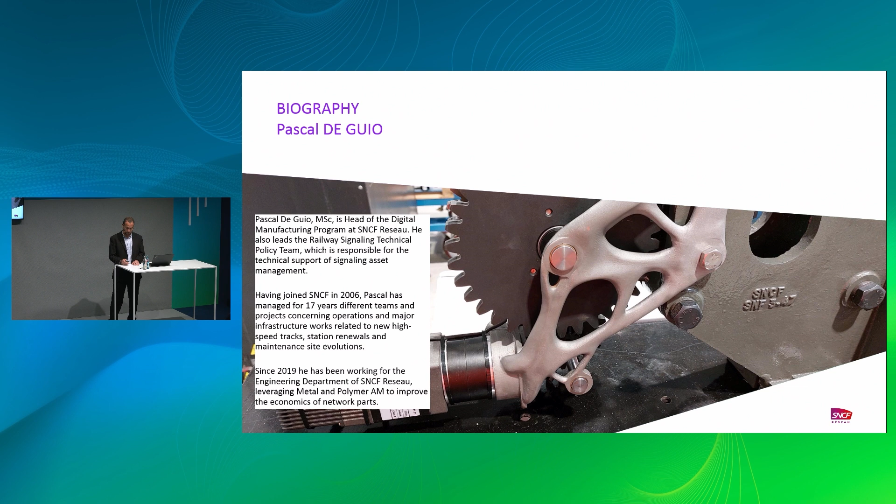So today my main objective is to share with you what are our stakes in additive, why we need additive, and what we need from the industry to really find solutions to our issues. This will be the first and main part of what I want to do today. I will then give you a few insights on the technical side of the job, what we do, what we have done, what remains to be done, and then I will try to summarize quickly in a single slide, but I think the main takeaway will be in this slide.

The first slide has only one purpose, just to explain that we do not deal with trains. I mean, passenger trains and freight trains are not in the scope of the infrastructure manager. Usually, when I talk about additive manufacturing for the rail company, people want to talk to me about flame retardancy, like in the previous meeting. I'm not really interested in flame retardancy, because I do not have passenger trains in my scope.

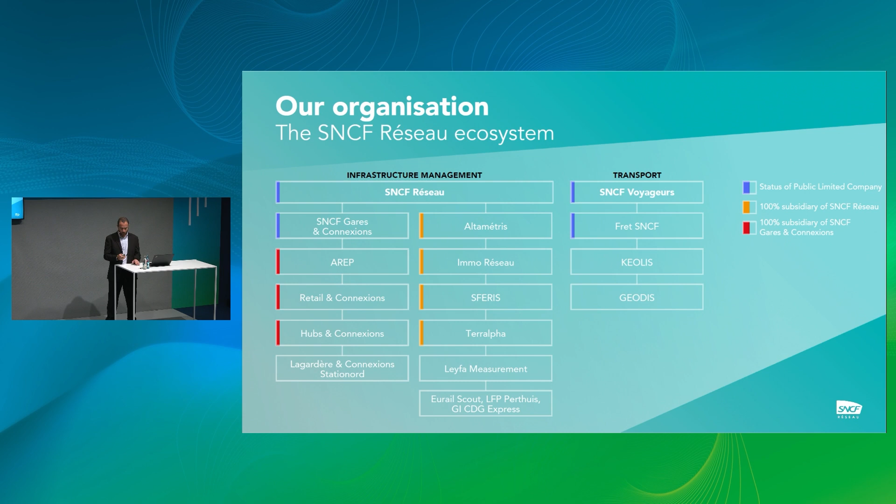So if we do not deal with the trains, what is our job? Mainly we sell the right to use the network. That's how we have our incomes, something like $8 billion per year, which allows us to maintain, develop, and modernize the network. Just to give you an order of magnitude, there are something like 50,000 people in SNCF Reseau, so it's quite a big company.

A classic picture, I think everybody has seen it at least one time in his life. What is the consistency of the network? Why are we interested in additive? Because we have a lot of different parts. Usually people don't imagine. First of all, we have the railway signaling. Railway signaling is not only about the signals, even if it's in the name. Signals are only the last step of the rail signaling job. Meaning, before opening a signal to a train, we have to know a lot of things.

Where are the trains? So we have every device on the track for train location, track circuits, axle counters, these kind of things. We have, of course, the command and control systems with a lot of different kinds of technologies. And with the input, we can use signals as output. Just to say, signaling is something like 15,000 different reference parts. So it's absolutely not only about signals, there's a lot of mechanical parts behind.

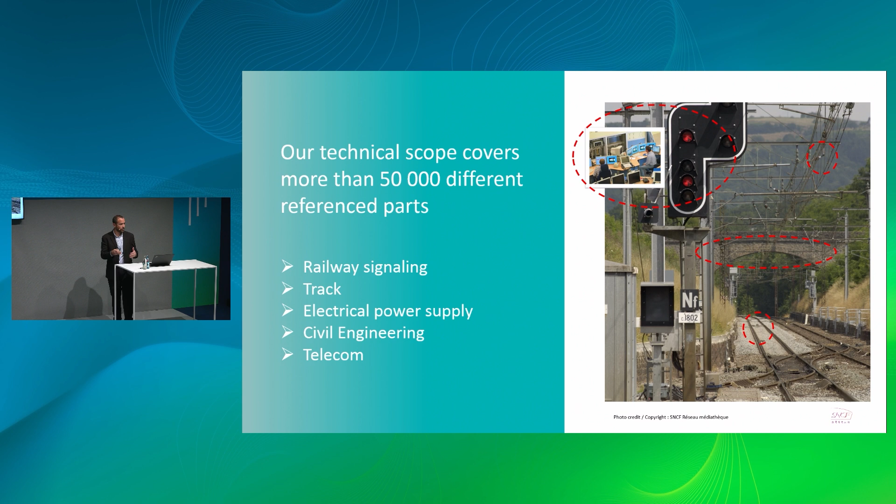Other opportunities: track, of course, quite well known, electrical power supply, and civil engineering. I won't talk about civil engineering in the following slides, but of course, we are interested in what can be done regarding bridges, tunnels, and all this kind of equipment.

This point is very important to understand what we need from additive. Rail industry is a heavy industry, meaning we need huge investment, and it's very hard to make this investment profitable. Sometimes it's not even possible. And what it implies is that we have, for a single function, something between 2 to maybe 10 different generations of device for the same function. Some are very old, some are very new, some are currently in development, but we cannot afford to replace all devices at every new generation.

It's far too costly, because of the price itself, but also because we have a lot of studies to make when we change the parts. Wiring diagrams, these kind of things, it's very, very costly. And as a consequence, we have a lot of products at different stages of their life cycle. This is great news for additive because we have products under development and we can use additive for rapid prototyping, why not? We have quite new products and we can use additive for mass production. We have in-service needs and we have obsolescence needs.

And the main use currently identified is about obsolescence, mainly because for the newer products, we already have contracts. Sometimes we do not even have the intellectual property of the parts, meaning we have a supplier entitled to the part. It's his job to make the parts with respect to the certification we made on this part. So it does not mean we are not interested in additive for newer parts. Of course we are, but it's something we do with our suppliers. So this is a key message for our suppliers. We are ready to speak about additive solutions for existing parts.

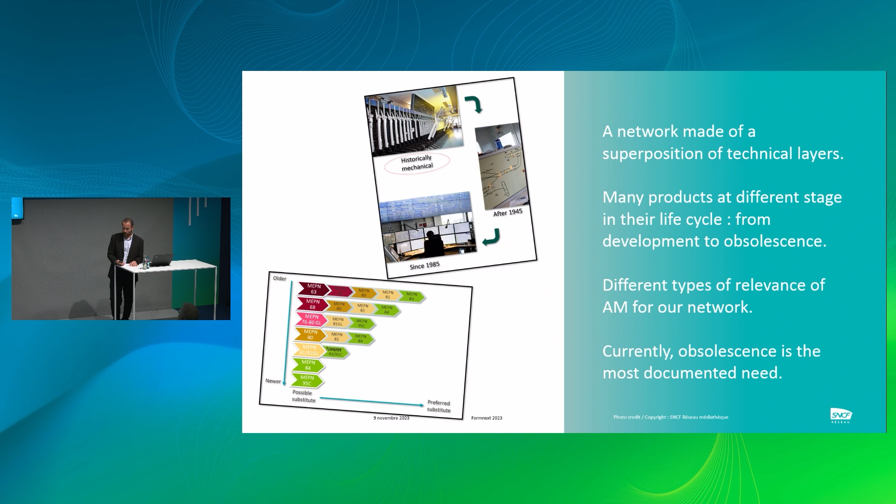But once again, main need for us, obsolescence, which is a well-known use case of additive, and I think you will agree with me to say this is not the best shot for additive, but nevertheless it's our use. With specific opportunities, of course. In particular, we can switch material quite easily, because for old parts, the constraint can be quite low. There is not a huge need to stick with existing material, so we have opportunities of this kind.

Opportunity of design, but at the same time, we cannot afford to change the design from scratch. We usually have to fit in assemblies, tight tolerances, this kind of thing. So there is a balance here. Sometimes it's great opportunities, and sometimes it can be more difficult. What is interesting also to share with you is that we have facilities in France. We have 5 facilities with a know-how on conventional manufacturing, machining especially. And this is a great advantage because we can do a lot of things internally.

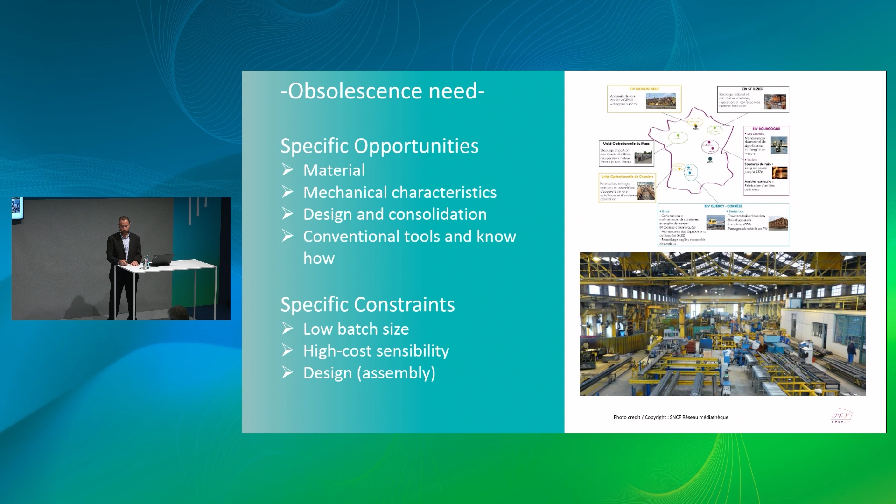Okay, maybe a few points on how we handle additive manufacturing given everything I said before. This is a huge program for SNCF Reseau with a few key points here. I don't have a lot of time, so I will try to stay on the main points. First point is that we try to deal with additive without forgetting conventional manufacturing. Every time we have an issue, we compare, we challenge additive with conventional manufacturing, and reciprocally, we can challenge a conventional solution with an additive solution.

So this is a very pragmatic approach. We do not try to find absolutely a solution for additive. It's only a tool among other tools. And okay, a lot of other points. What can be stressed here is that we are very open to partnership, and that's why we're here today, because there is a lot of work to do together.

And especially as we have facilities, we can do some part of the process regarding machining, post-process. So there are different paths that we can find to produce the part with additive, with suppliers. We can make as-built parts with suppliers and make the finishing part in our facilities. Okay, there are different kinds of solutions, and it's an opportunity for us to address our issues.

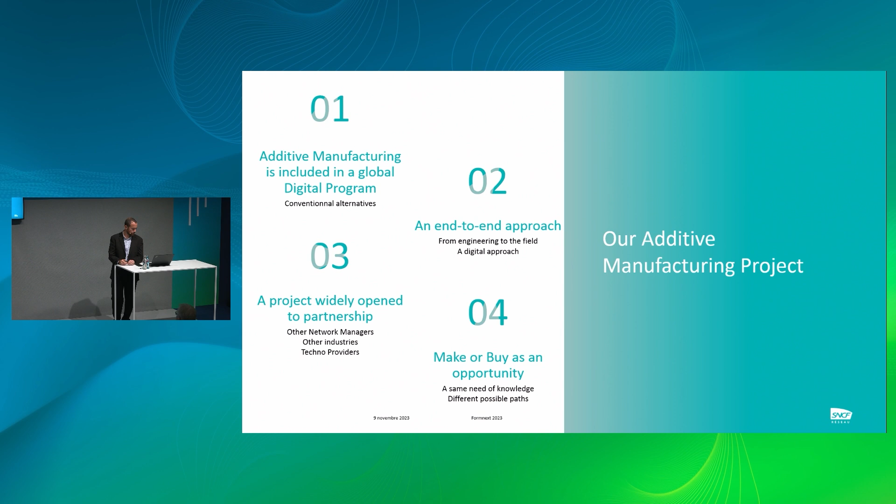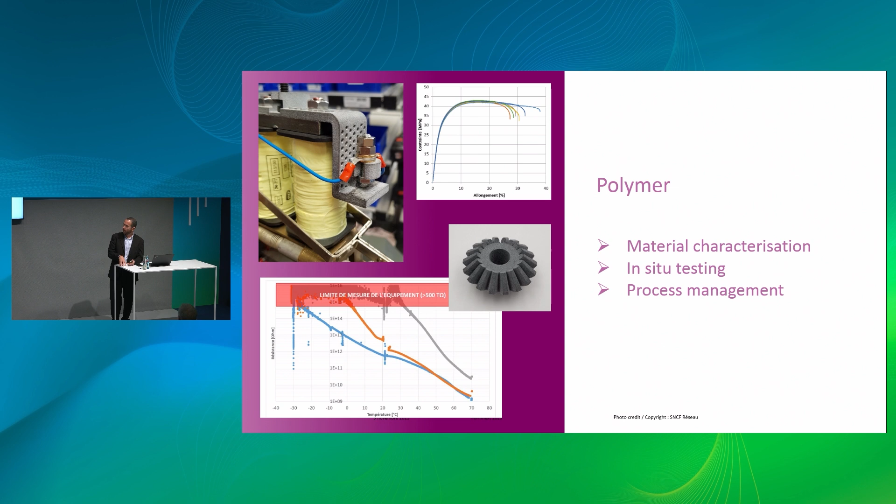And you can see PA12 is 1 to 2 orders of magnitude better in resistivity no matter the humidity situation, no matter the temperature. Okay, this is only one part of all the investigation we made on PA12. We also have made some in-situ testing, and we have investigated the ability of the process to be repeatable and so on. This is the process management. What we need from here is to continue the work on polymer.

Regarding the MJF technology, we need to go further into producibility, repeatability, predictability. There are quite a lot of issues to address. So PA12, our first need. We also want to go further regarding PA11, MJF still, but also selective laser sintering. For our use case, we sometimes need a huge stiffness. And for the sake of stiffness, it can be very interesting to find composite solutions. Maybe SLS, maybe continuous fiber.

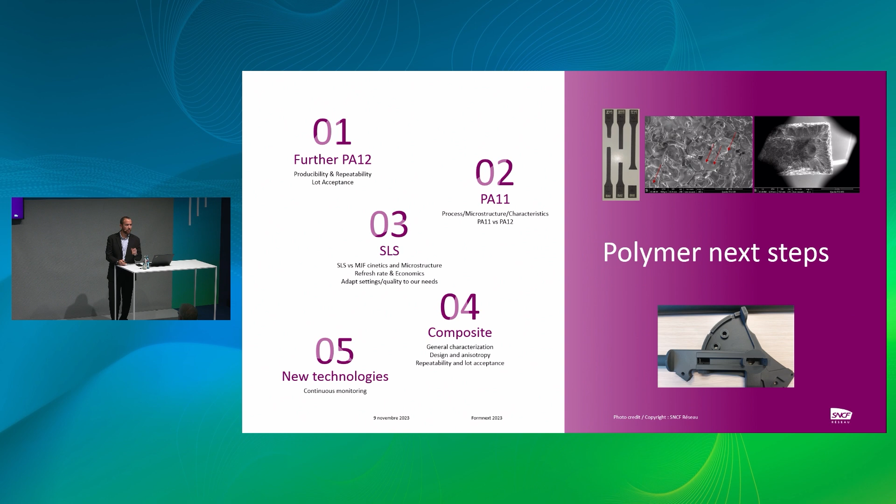So we have a lot of work that we want to launch in the next weeks on this topic. And we also made some work, but maybe we will have questions about this later. Okay. And new technology, of course.

Regarding the metal part, we have made mainly indirect casting. Indirect casting is usually stated as a low-hanging fruit for additive. It's not so easy. We've made quite a lot of testing to deploy parts on the field, something we have already made. As you can see, there is a lot of documentation on this process. It works quite well, but there still are some axes of work, and I will come to this later.

We've made a few works on selective laser melting. It's the second part, mainly design-oriented. We've made a comparison between topological optimization and generative design in order to find the best way for this consolidation. It's a consolidation of 8 machined parts in a single one for the motorization of a lever. Okay, once again, we can talk about it later if you want.

Main issue with selective laser melting is the price. We need to be very efficient on price because for obsolescence purposes, we usually have conventional alternatives. Even casting for 2 parts is an alternative. So we need to be very cost efficient to find the best solution. And as selective laser melting is very cost intensive, we wanted to see what metal binder jetting can do.

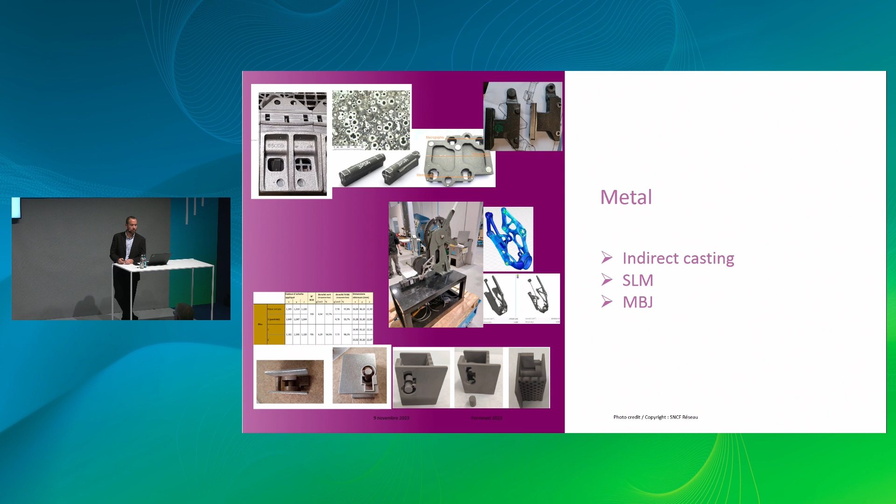We've made some testing. There's a lot of potential, and once again, a lot of future work to do. On next steps. Next steps regarding indirect casting. Once again, we need...

For industrialization, we need to have a better assessment of the sand mold to have better end part. Let's put this that way. For SLM, main point is to try to lower the cost.

And one of the ways to do this, there are 2 ways maybe. First one, maybe find the good settings for our just need. Maybe we do not need the best settings for the best part. We can afford to have low mechanical characteristics, guaranteed, but low. And for this low mechanical characteristic, maybe we can have settings that are better for the cost. The layer height, maybe the speed, the laser speed, these kind of things, okay?

And on the qualification also, maybe with monitoring, we need to lower the cost of every steps of production for this technology, at least for our purpose. Metal binder jetting, same thing. What we need here is to have a technology which answers our need, just our need, at the right price.

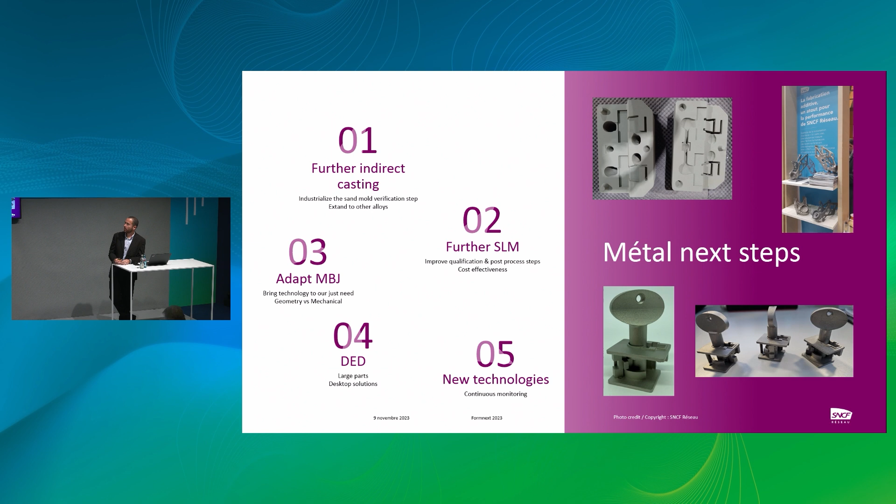And for metal binder jetting, a solution could be just to have parts that are not full dense, because we don't really need full density for our application, or not for every application. And in this case, maybe partial sintering, this kind of solution, infiltration, could allow us to have good geometrical tolerance and at a low price. So this is exactly the kind of solution we need. We're also interested in DED, but I have no time to talk to you about that.

Okay, last slide, and then I will take your question. Okay, factors, what we need from the industry, how we think we can advance on the topic. I think you have understood, we need to be very cost efficient. We have great opportunities, but we need to find the right cost and the right quality. Quality is maybe not a good word. Behind quality, I mean producibility, repeatability, predictivity.

And in order to find the good balance, the good cost, and this good quality, we need to work on the technology, fundamental knowledge. We have a lot of work going on this to really understand material properties and the link with parameters. We need to find accurate settings for our need, what we can accept, what are the consequences of the settings.

We deeply believe in screening, design, and simulation to help us to do the right part from the first build. We cannot afford to make 10 builds before having a good part because this is absolutely not cost effective. We really need to be able to have a good idea of what will be the end part before producing it.

And of course, it's the main point, we need an efficient industrial ecosystem. We have a lot of partners, a lot of very good partners in France and in Europe. And we need to deal with this topic with these partners in order to find solution.